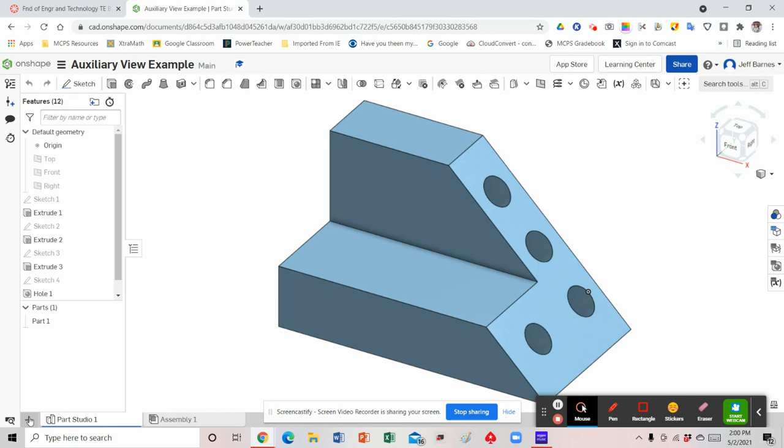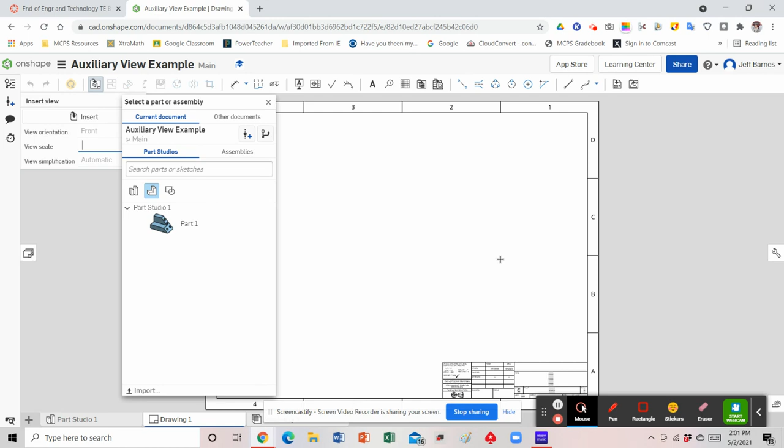So we're going to go ahead and start our drawing like we've done in the past, and we're going to click in the left-hand corner, the little plus sign, and then we're going to select Create Drawing. And then we're going to choose ANSI C Inch. And click OK. And as it loads, we're going to set this up just like we've done in the past, where we're going to set up a top front right side view initially, and then we'll add our auxiliary view on a second sheet. So I'm going to go ahead and choose my part.

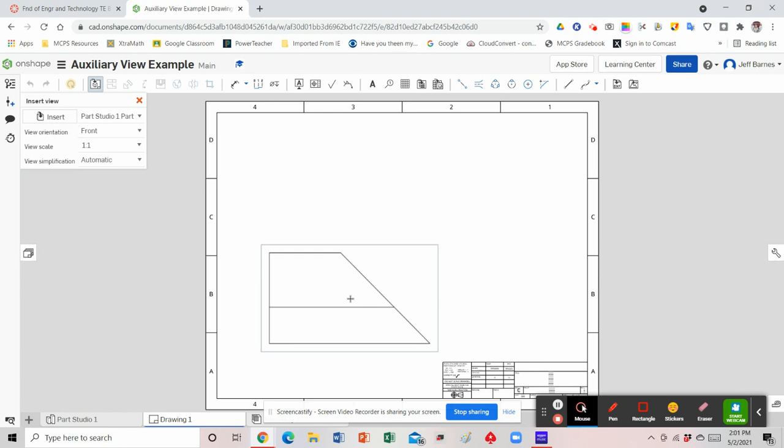And as you can see right now, my view is pretty small. So I'm going to go ahead and increase the scale size from 1 to 2 to 1 to 1. And that should be the appropriate size, and we're going to keep it as the front view orientation. I'm then going to place my view, my front view, in the bottom left. I'm going to drag up, place my top view.

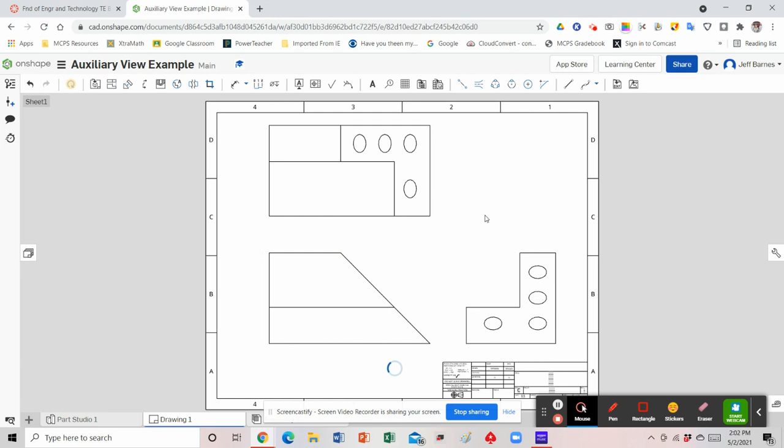Okay, come down, click on my front view to do my right side view. And then last click on the front view to do the isometric view. And as you can see, this isometric view is huge, so I'm going to have to scale that down. So I'm going to uncheck projected view. I'm going to right click on my isometric view, view properties, and then I'm going to go ahead and scale that down to 1 to 2. And that should work. Hit the green check mark and place it in the top right corner.

Okay, so now we're ready to start dimensioning. I'm going to go ahead and edit my drawing properties and edit my text size to 0.250 and scroll, click on the annotations tab as well, and then change my notes to 0.250. Okay, call outs to 0.250. And then I'm going to scroll all the way to the bottom and select hole call outs as well and make that 0.250 and hit enter. Okay, so I've edited all of the fields that I need to increase the text size, and now I am ready to dimension.

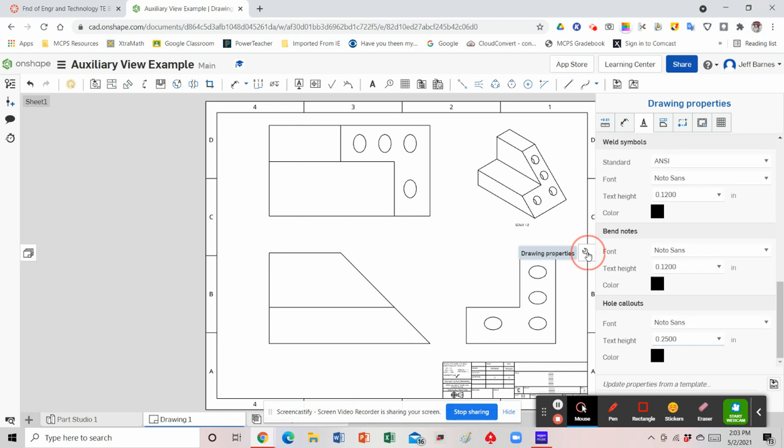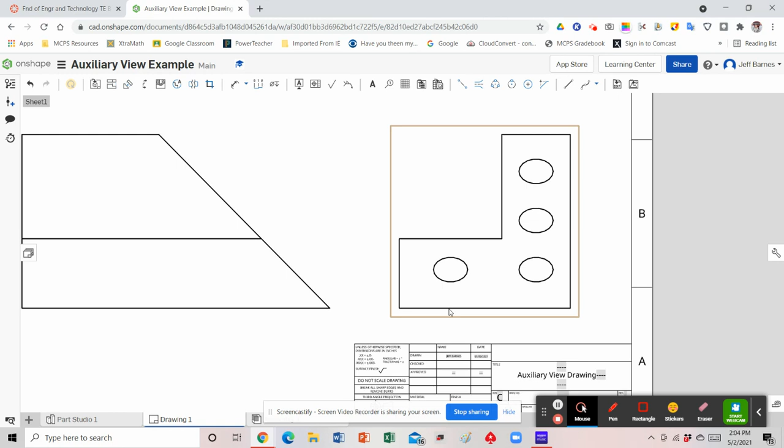Let's go ahead and call this auxiliary view drawing, and then hit the check mark. Okay, now that I've labeled my drawing, auxiliary view drawing, I'm going to go ahead and right click, zoom to fit, and now I'm ready to start adding in my dimensions. So again, I'm going to follow my dimensioning reminders as I've done in the past. I'm going to start with the height dimension, do my width, and then my depth.

But notice here, if you look on the drawing here, it's really hard seeing this sloped surface from either the top view or the right side view. And even the circles there look like ovals on both the top and the right. So that means you can't really dimension them accurately as far as the size or the location. So that's why we're going to be creating an auxiliary view. But again, first we're going to go ahead and set up our dimensions starting with the height. So I'm going to go ahead and click on the dimension tool. And we're going to go ahead and add in dimensions as we go.

So we know the height is shared between the front and the right side. We can look and see we have some contour here, right? We can see the sloped surface from the front view, and we can see the cutout section. So I'm going to be using both sides. And I'm going to go ahead and select the top edge and the bottom edge and drag my overall height to the left here, which is 5. But then I'm going to choose my baseline edge, okay, and then dimension it from the bottom up. But I'm going to do that here because I can see the cutout section.

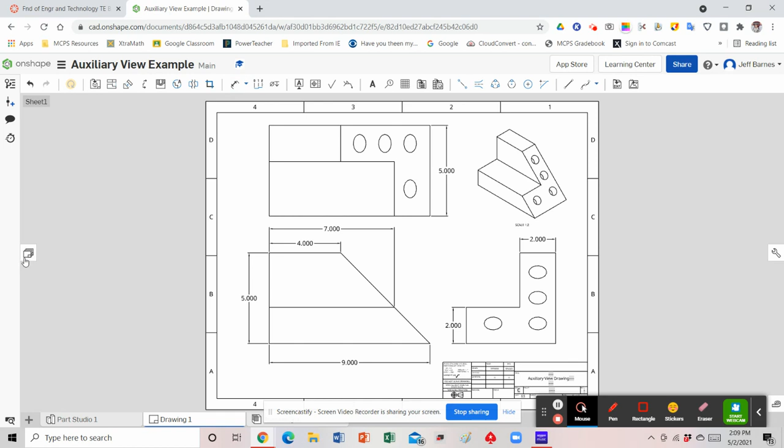Okay, so now that I have my height, width, and depth dimensions in, I'm ready to start working on the auxiliary view. So again, we are going to create a second sheet. So I'm going to turn off the dimension tool, come over to the left-hand side and click on our little stack sheets icon. Click that once, and then again, go to the top right corner and select Insert Sheet. So again, here's my page 2.

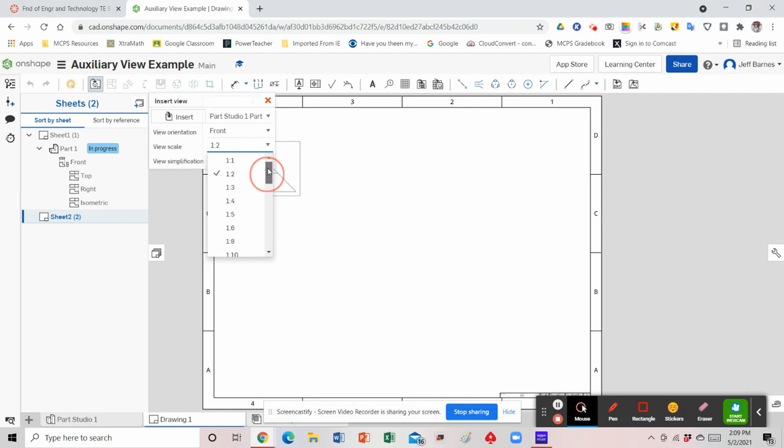Now I'm ready to insert my view again, and I'm going to click Insert View up on my top menu. Again, I'm going to have to edit the scale size to 1:1, and I can leave it in front orientation, and I'm just going to place my view towards the bottom left. Now I'm going to turn off projected view, and I just need my front view in here because what I want to focus on when I'm doing my auxiliary view is the edge that I need to see, which is the slope surface here, and it's just being shown by the edge.

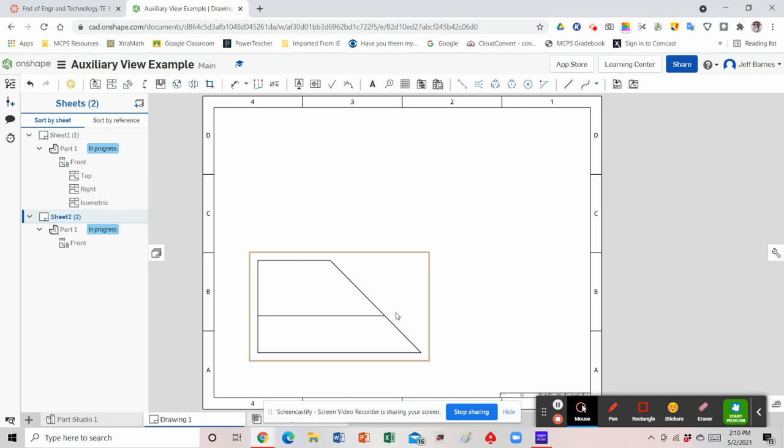So now I'm going to come up to my toolbar and select auxiliary view. It's this icon right here, just to the right of projected. Click on that once, and then you're going to come down and select the edge that's slanted on the front view. When you do that, you'll notice that your view comes out, and you can see the size of it. It's pretty big, but I think that's going to be fine for what we need to do.

And again, we just want to make sure that the edges of the figure are not going outside the border of the page. Okay, and once that's there, now we can see that slope surface, and it is much more straight on view. And you can see the holes look like circles here. So now we can dimension them the same way as we've done before. Okay, so the first thing we need to do is mark the centers. So we're going to click center mark, and then I'm going to click each of the holes.

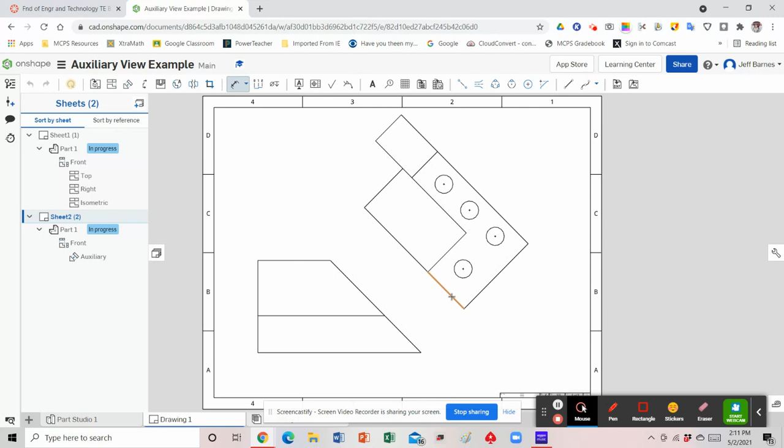Now I need to mark the locations of those holes. So again, we need to pick 2 perpendicular edges to do that. So now I'm going to select my dimension tool, and I'm going to work off the left edge, and I'm going to click the left edge to the center of the circle and drag down. And this time, because it's an auxiliary view, the extension lines can be angled like this. Notice the dimension text is completely horizontal, which is exactly what we want. So this is fine for this type of dimension when you're doing an auxiliary view.

Now we need to mark the left edge also to the center of this hole and drag that down. And those are the 2 dimensions. These 3 holes are all aligned to one another, so I don't need to dimension each one. It's going to be the same dimension. If these holes were offset or zigzagging on the drawing, then yes, you would have to dimension each one. Then I need to mark the distance from the bottom edge.

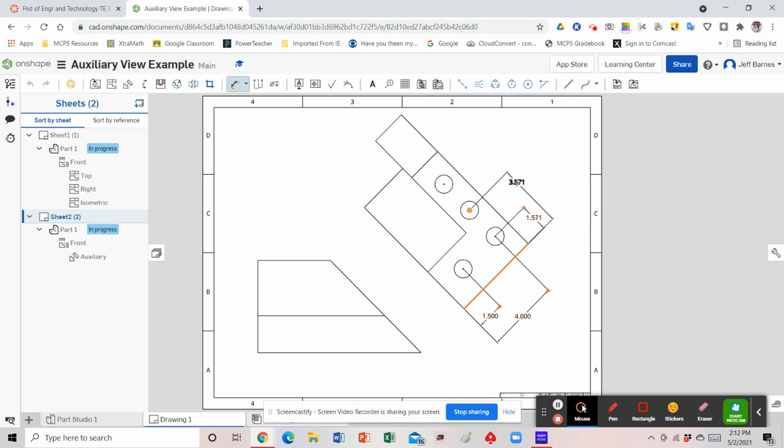So we selected the left edge here, and now this bottom edge. So I'm going to click that, and again to this hole. Okay, so that's obviously a smaller dimension. Then we're going to work our way up here, a little bit larger. And then the furthest one is going to go furthest from the part. Okay, so those are the 4 dimensions that we need as far as the location there.

And so now we can dimension the holes themselves. So this time we're going to select hole callout. It doesn't matter which hole you select. All the holes are the same, but if they were different, you would need to dimension each hole. So I'm going to select this hole here. And you can place it here, actually above here. It looks like it's in a good spot. It's not crisscrossing any of the dimension lines or extension lines, and it's in a perfect position. So I'm going to click one time.

Go ahead and click on the little icon here to get the little window to pop up. And because there are 4 holes, I'm going to click in this box here and then select 4x, space, and that'll tell me each one of these holes are the same 4 times, with a diameter of 1 and a depth of 1. And then click in the empty space, uncheck hole callout, and then I have those dimensions accurately placed. So that is how you create an auxiliary view and then dimension the holes on that auxiliary view.